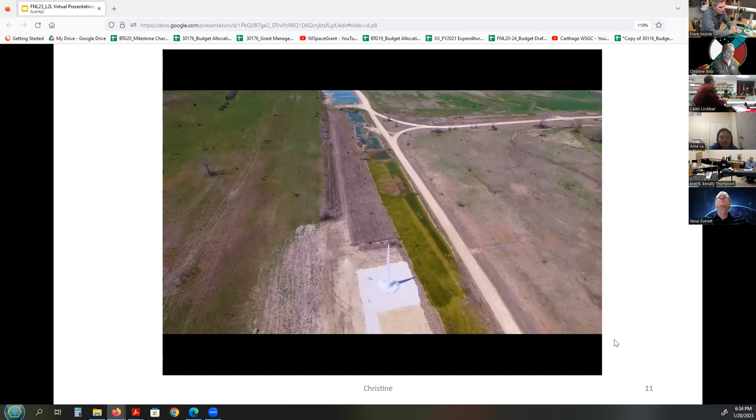The First Nations launch has been an amazing opportunity for me. The whole goal is to design, build, and fly a rocket. We launched our rocket earlier this day. It was really exciting. No matter what team they're on, everyone works together. The camaraderie that's built among the teammates and the team members, students, advisors, grad students, undergrads. Launching our rocket for the first time was exciting. I didn't know what to expect, so just watching it up in the sky and being able to hear it was just amazing.

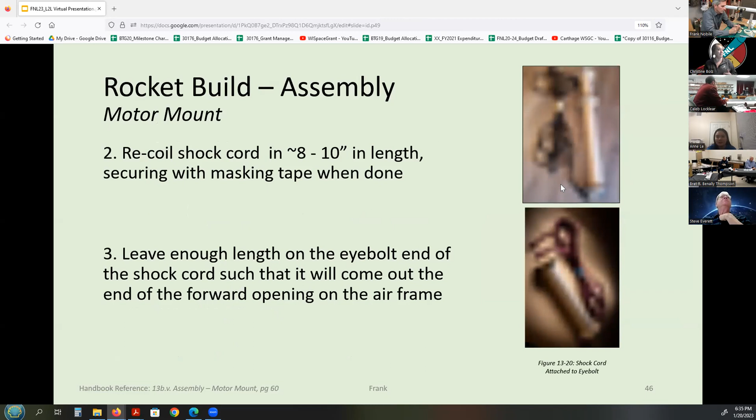So I hope that excites you. Oh, we're just going really quick here. Where did we go? I hope that gets you excited about what we're going to be doing and all that you're going to be learning. My apologies, I don't know how I got to this. I'm going to go to escape real quick. Whoa. Well, there we go. My apologies, everybody. Let's get you to here.

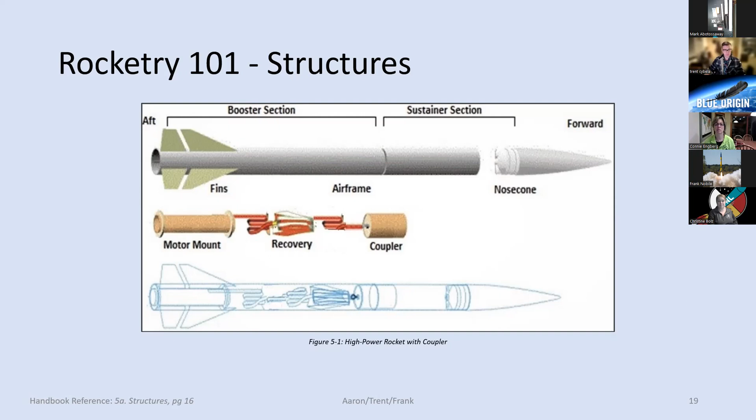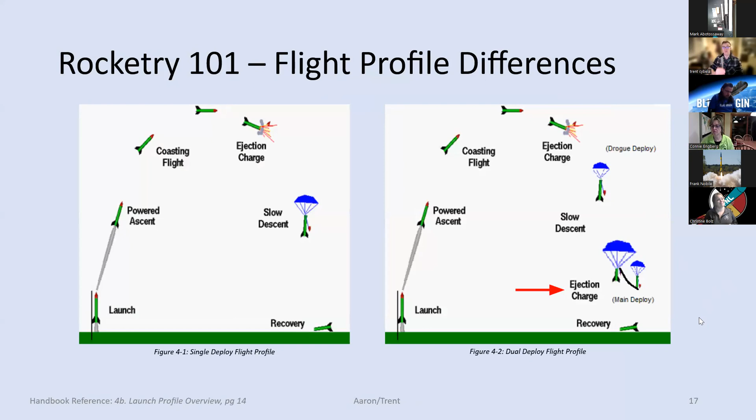Okay, cool. So the next couple of slides are us doing our first introduction to RockSim. What we're going to do over these first couple of slides is I'm going to show you how to find the model file for the Caliber ISP rocket that we're going to be building together over the next two days. And then just doing a very simple overview of some of the user interface for the RockSim program.

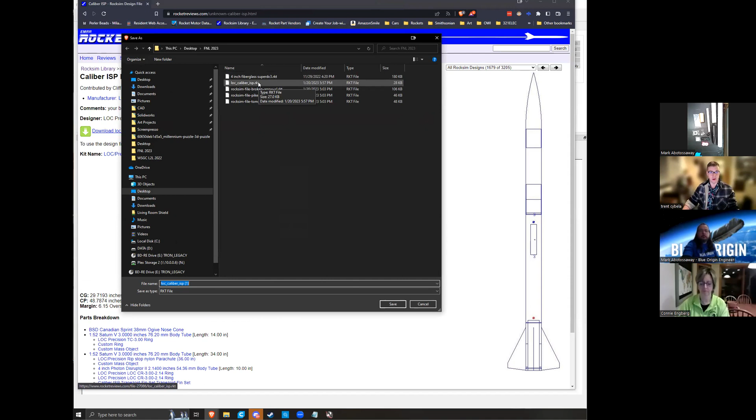Once that's downloaded, I can go back to my window right here and go to File, Open, and then go to wherever you saved that file. It opened right up for me because I have it saved on my desktop. We're going to select LOC Caliber ISP Rocket and open that up. It took a minute there, and here it is.

As we talked about before, this is a wireframe representation of our rocket. I can look at it from this side profile here, or alternatively, if I select this button, I can switch to a front profile to look at it from the front. So what we're looking at here is you can tell this rocket has 4 fins because you're looking at it straight from the back, and you can count 1, 2, 3, 4 fins on it.

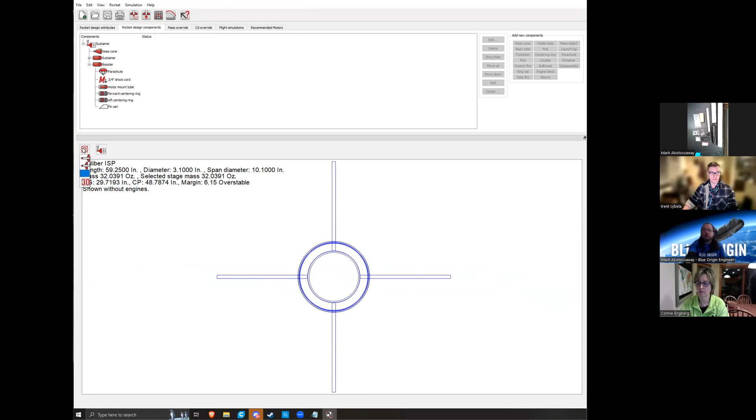Or if you want to get cute with it, there is a way for you to look at a 3D representation of it too. If I select this button and go to the drop down and hit 3D, here is a 3D representation — a little bit crude, but a 3D representation of that particular rocket. You can drag this and flip it around to look at it from a bunch of different angles. There's actually a way to export this 3D model too, although it uses a file format I'm not especially familiar with.

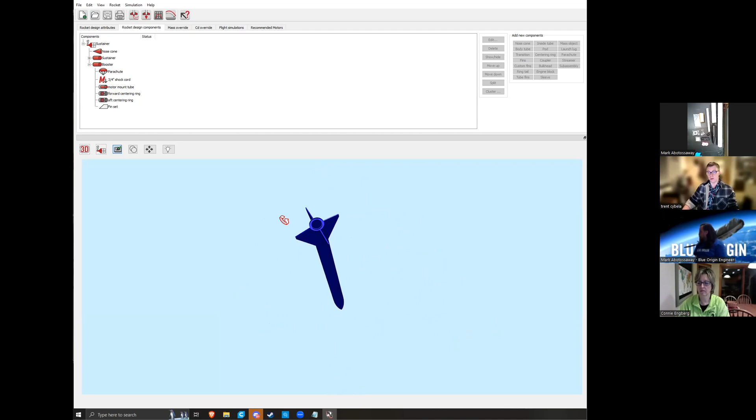You can also change the color of it so that it looks a little bit prettier and nicer to look at. But all in all, you're not really going to be using this 3D model too much. You're going to be using this 2D representation here.

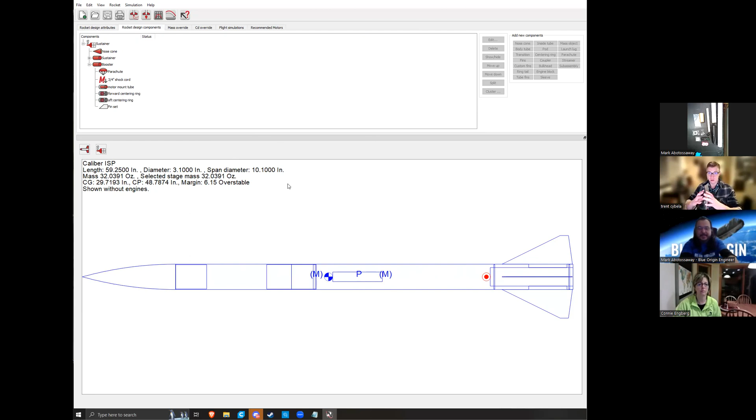Now I don't have too much more time left for this section, but in addition to looking at the wireframe representation of your rocket down here — where you can see the booster and sustainer section, the motor mount tube, the fins, all of those components visible here as effectively a drawing — they're also up here at the top too, organized in such a way where you can see the sustainer section and the booster section, just like how we talked about before.

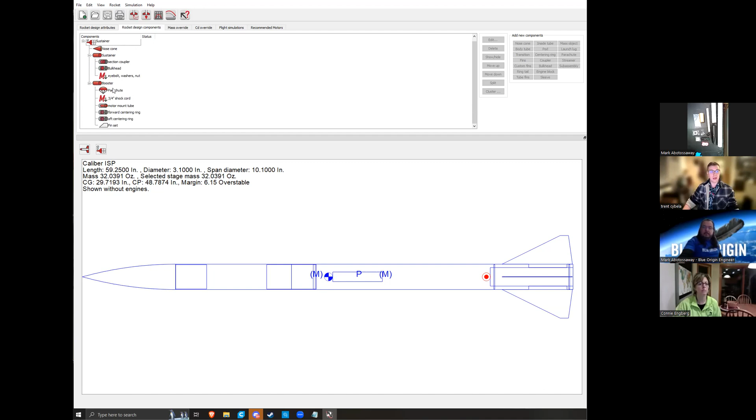And then if I click these little plus signs that are next to sustainer section and booster section, it shows you all the components that are inside of both of those sections of tubing. So inside the booster section, which is the back side of the rocket, the parachute's in there, the shock cord is in there, the components of the motor mount tube are in there, and the fins are in there.

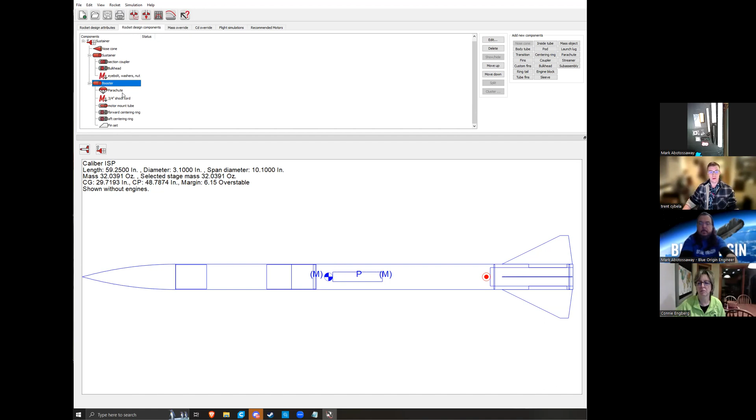You can change the weight, the dimension, the size, the shape of all of those different components by double clicking the items that exist inside of this component selection tree. Similarly in the sustainer section, there's not too much more, there really isn't too much in there. At any rate, the components exist in that tree file format, and affecting those components in that list affects what happens in the wireframe model below.

And I'm out of time, so back to you, Chris.

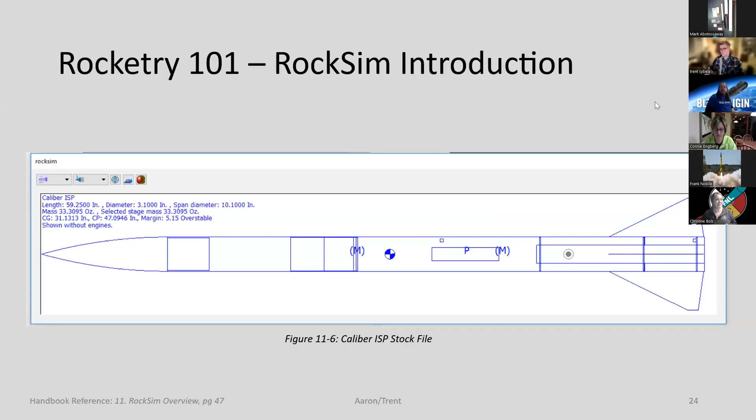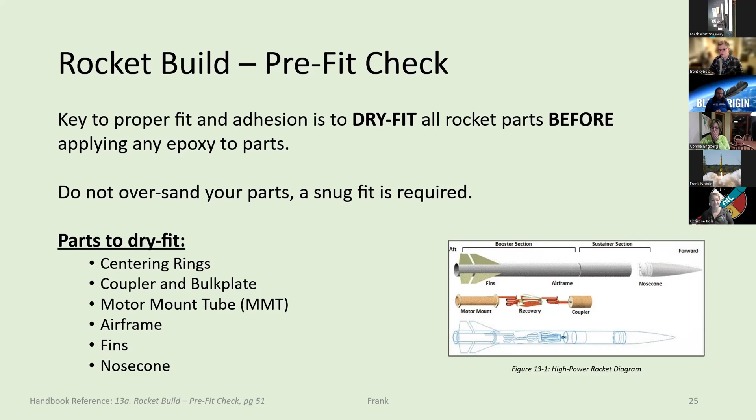Okay, we're going to identify the parts that you have. You should have a forward motor mount ring, which only has one small hole in it, as shown in the top picture. That's the forward, and I would take your pencil and write forward on it, or FW. The next ring has no holes in it except for the 38mm hole that you see here. Please write MID on it for the mid motor mount ring. And last but not least, you should have one more motor mount ring that has two small holes on it, on each side. Please mark that as the aft.

And on the aft side, please put the word 'in' on it. I see you got that on there. Thank you, Mark. It's very important, the aft and the in.

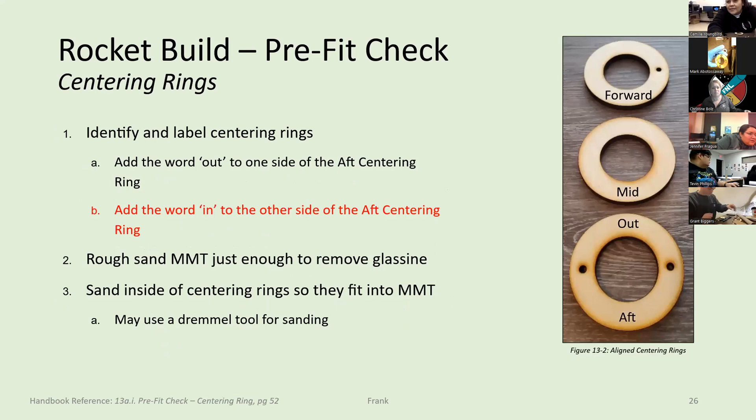Yeah, flip it over there. Yes, there are some machine screws that go into the T-nut. Yes, but do washers go on those screws that go into the T-nut? No, they do not. Okay, thank you.

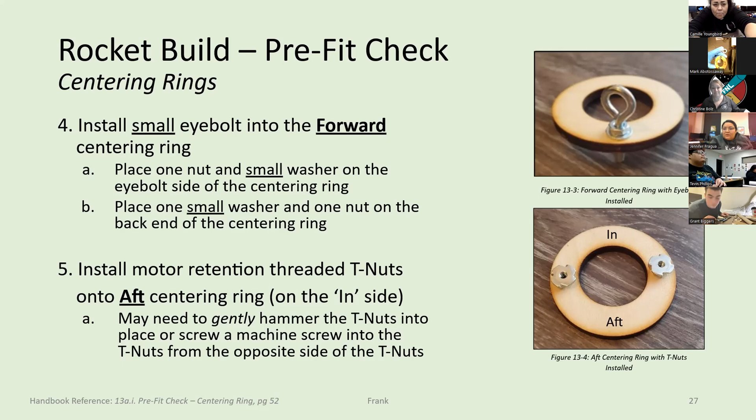But we're not putting those screws into the T-nuts yet, am I correct, Frank? That is correct. So you should not have screws in the T-nuts. Take those screws out, put them off to the side, use them later. Excuse me, Frank, I have a question. Yes?

When we're putting the T-nut on, it kind of goes to the outside and there's a little bit of a lip there on the side. So yours are perfectly centered, but on mine it has a little bit of a lip over on the outside of the ring. Okay, so your flange is hanging over on the side. Yeah, just a little bit, but not too much. That's no big deal. Thanks for bringing that up though.

I tried to send... Hello, hello, this is Lyric from Fort Lewis. I have a question. Can you guys see my screen?

Yes, if possible. So the placement of these T-things, whatever they're called, is more close to the outer radius of the circle, whereas the demonstration had them right in between. Yeah, so here's the big one, that's the one that is right, and this one is the small one, they're just at a different radius. Will that be a problem?

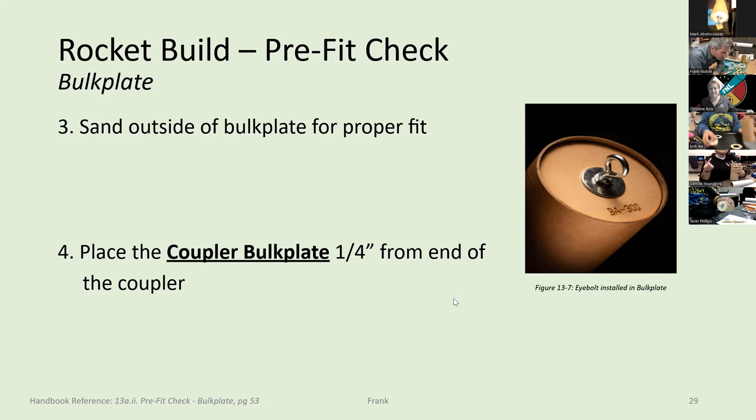I'm going to go to the next slide. Okay, sure, go ahead. Okay, let's do the centering ring alignment.

All my parts here, this one and this one. Okay, the centering ring should fit on the motor mount tube. We're talking about your forward centering ring and your mid centering ring - that's all we're going to work with right now. We're not going to be working with the aft ring right now, that'll come later, so put that off to the side, please.

What I want you to do is take your forward centering ring and drop it down to approximately 1/8 to 3/16 below the motor tube. I want you to draw a line around that circle on the outside of it. Doesn't matter on the top or the bottom, but I would prefer you draw the line on the bottom. If you do it on the top, no biggie.

Could you repeat that measurement please? 1/8 to 3/16 of an inch. I go with the 3/16 - that's like close to a quarter inch. How's that? You know what 3/16 is, you know what a quarter inch is, so if you go to 1/4 inch, just go a little tick up. You should be about 3/16.

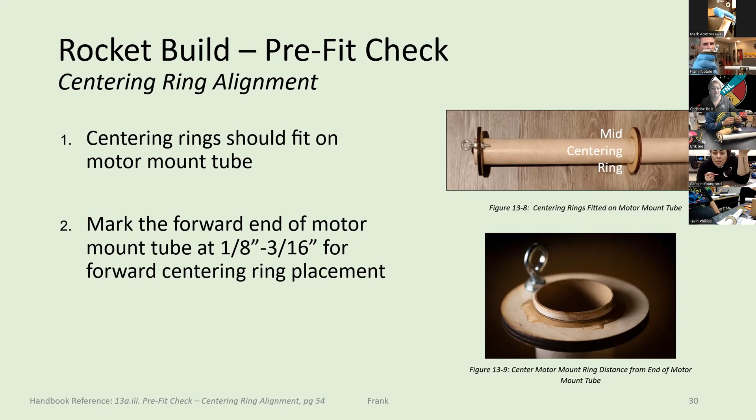What we're all going to do here is apply glue below that line, some epoxy, and we're going to be applying glue at this mid center too. We're going to push all these centering rings up so you have a nice fillet, so you got to make sure that reference mark is being covered right - you stop right at the motor mount ring. And we'll be using the top in this case. The measurement on the top, if you already marked the bottom of this already with the circle mark, this part isn't crucial. It's the next part, the mid motor mount ring, that is crucial where we have to put it.

Center ring alignment - measure the distance from the aft end of the airframe. I'm going to take a few seconds here to explain what aft end and forward mean, okay? Every part of a rocket - booster, sustainer, nose cone, motor mount tube - this is the aft end of the motor mount tube, this is the forward, because we put the forward motor mount ring, this is the forward part. On the booster, you have the aft and the forward. On the sustainer, once you have the nose cone on, you have the forward part of the sustainer and the aft part of the sustainer. So when you're describing a part, you know what end you're referring to. Okay, measure the distance from the aft end of the airframe.

I think Mark is on it. I got it right here.

Measure the aft end of the airframe, which is where the fin slots are. That's the aft end of the booster, to the forward slot for the centering motor mount ring placement.

So when you measure from the aft end of the airframe to the forward fin slot, this is the forward fin slot. And you measure from the aft end of the booster of the airframe and make sure you're at 0, not at the end of the ruler.

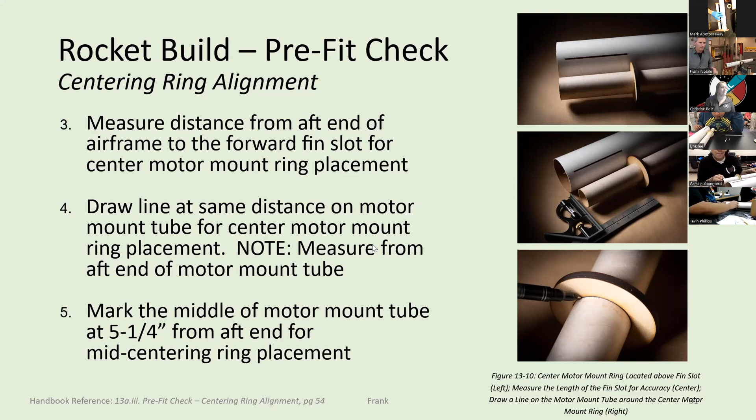Y'all got that? All right, thank you. Don't give me the 'it's off by 0.5 millimeter.' It's close enough.

I think mine's off by 0.5 millimeter. They're funny, they're a comedian. Brenna, yours is looking good. Thank you for showing us. If you're off that millimeter, then you measured your ruler wrong.

I loved what you did, Brenna, when you showed your motor mount tube next to the airframe so that we could see how that mid-centering ring was clearing the fin slot. Good job. Perfect.

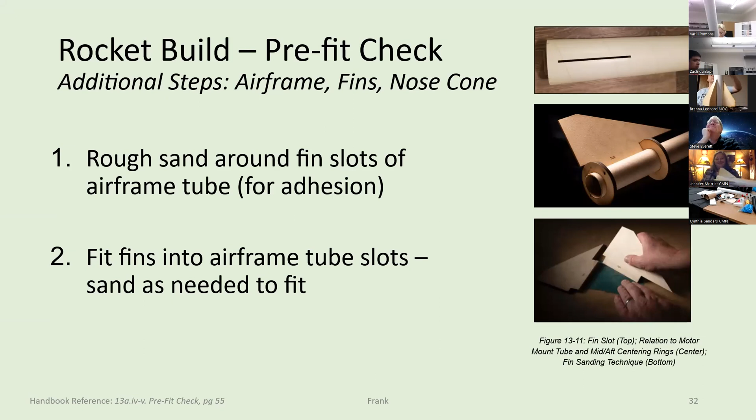Jennifer Morris, you're doing a great job. Okay, once you have your fins fit in, you can pull them out, put your fins to the side. Looks good, Anne.

I think Mark was going to go over epoxy. Is this me for epoxy? Yes sir.

All right, so in your kit you should have received a package of epoxy. It's 2 parts, there's a hardener and a resin. The resin is the white bottle and the hardener is the red bottle. So you'll go ahead and pull those out, and then to take the cap off, you'll need to cut the top open. There's also a safety cap on the inside that you also need to remove before you can use the epoxy.

So if you haven't already done so, get your epoxy out, get your epoxy ready. We'll be epoxying here shortly, the next step. Make sure you have your gloves on. Yeah, I have my gloves on. Thanks, Camille, thanks for watching out for me.

Always put your gloves on, and you can take pliers or your little fingertips with your gloves on and pull that cap off, or take a screwdriver and pop the cap off. When you pop it off, hold on to it, please. It's gonna fall on your shirt, your pants, or on the floor. Discard that cap.

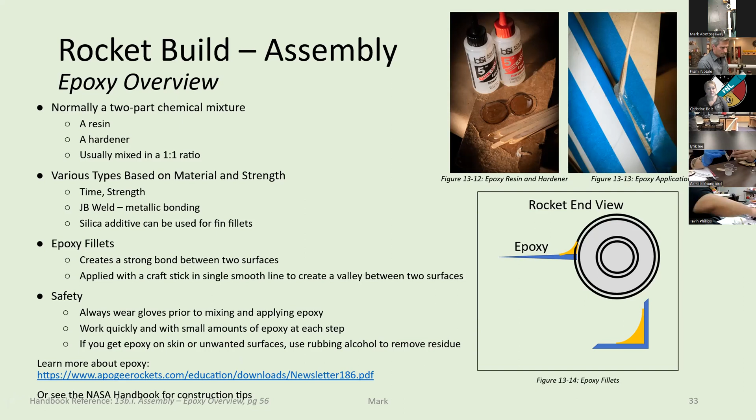And if you have some rubbing alcohol, be my guest to use it. And if you do have rubbing alcohol of some sort and you have to clean your gloves off, use paper toweling, and you can clean your gloves off from the epoxy too with this stuff.

And I do want to note, I understand it is almost 5 minutes after 8. This next step is going to take about 10 to 15 minutes, and then hopefully we'll be able to finish up. Okay, everybody have their gloves on? Gloves on.

And we're going to take our centering ring and drop it down below that line you made, because when we apply epoxy, we're going to apply it below that line and push these rings up. And we're going to leave the motor mount tube this way, because epoxy wins against gravity.

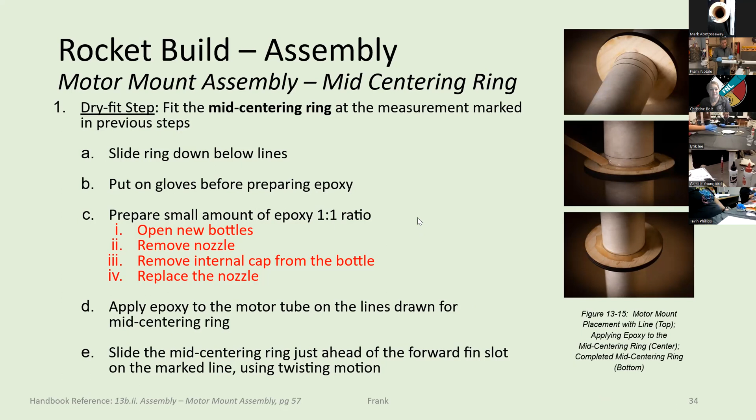Oh, that's a little too soon. It's a little too late. This is the step we just did. Oh okay, my apologies.

What I want to do though, I really like to put some epoxy on these T-nuts so they set up good for tomorrow.

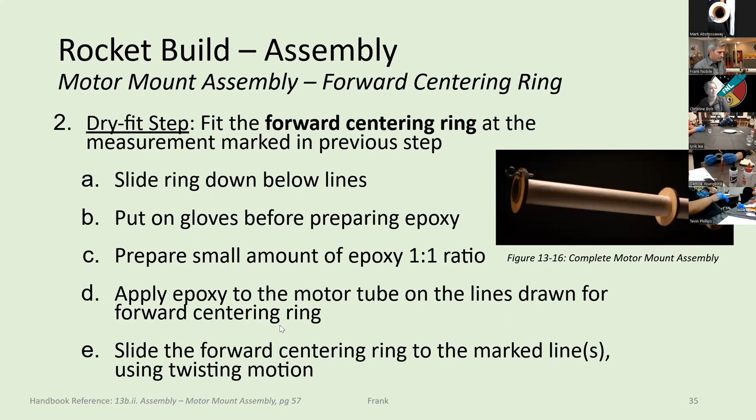Wait a minute, Frank. Okay, we did this, did this, we did this one. I do not believe you did this step. Well, that's where I want to do all this.

Perfect. Okay, what we're gonna do next, after you've got all your motor mount rings set and nothing's dripping, and your epoxy is pretty stiff, is mix some more epoxy.

Wait, Frank, let me see yours again. I think I just messed up.

Who's that? It's Abby. I'm really stressing out. Oh, I did something wrong. What'd you do? So this is what mine looks like.

Oh, you're fine. Mine's a shorter tube. Sorry, that's what confused me a little bit earlier too. As long as this mid tube is 5 1/4 from here to the aft end, you're good. Perfect, golden.

This one, we haven't put on yet, correct? Correct, right, that stays off. The aft end motor mount ring - put that in front of you right now anyways, because we're going to need it.

So this is correct? Yes, it is. Okay, cool. Yeah, mine's a little bit shorter too. Mine's an example, sorry. Okay, you got good eyeballs there, you could tell.

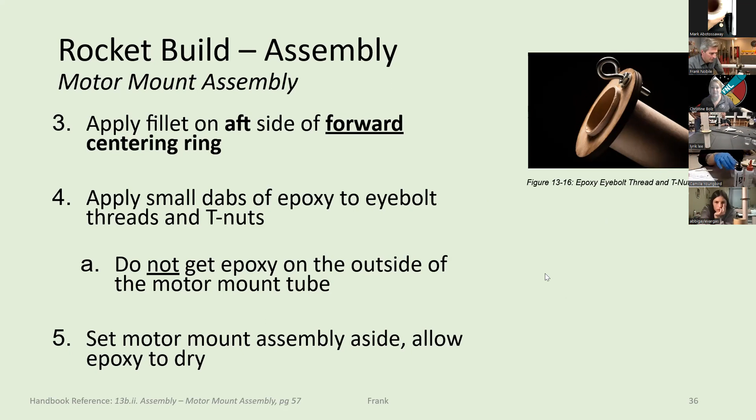All right, well while you guys are finishing up, I am going to go over a few things for tomorrow. We will start at 10 a.m. exactly. As you can see, it's going to take us a little bit longer to get through some steps because we have so many of you and we're trying to make sure everybody is doing everything the way we're supposed to. So we'll probably open up a few minutes early so everybody can be in place, ready to go at 10 a.m., and make sure you have your handbook with you, all of your supplies ready to go, drinks, snacks if you need it. Have all that ready to go so we can get through everything as expeditiously as we can to get everybody out on time at 6 o'clock tomorrow night, so we don't have to eat into lunch or break times. We will stay a little bit after tonight to give you an opportunity, if you didn't finish something or have a question, we can answer that for you. When we start, we'll start off with a morning review, asking questions about what you've learned today, and then we'll get right to it. Anybody have any questions?

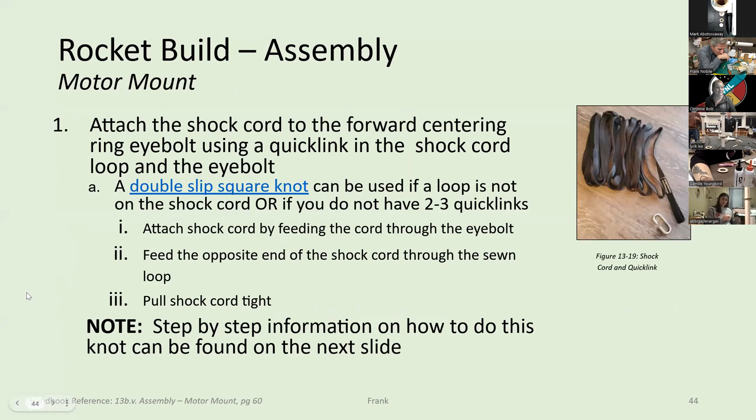So good, boy, there you go. Jennifer Morris, I am just so happy you're here. I can't tell you how happy I am you're here. And just wiggle it up. Yeah. Now I can't plead ignorance with my team anymore. Yes, yeah, Jennifer looks happy too.

Frank, I do have a question. So when I put the middle ring on, it slid a little bit, so I want to make sure it's even, like closer to 5.5 rather than 5.25. Do you want me to do something about that before tomorrow? You want me to cut a quarter off at the end, so it's more laying on top of the fins?

If it's on there already, no big deal, but I'm just going to do this if it's better, it's longer. What you can do, I just don't want you to get it crooked. You can cut the tube if you can cut it straight. Okay, so just cut a quarter of an inch off the end of the tube. Yep, 5.25, okay. Got it, I'm on it. We won't tell anybody.